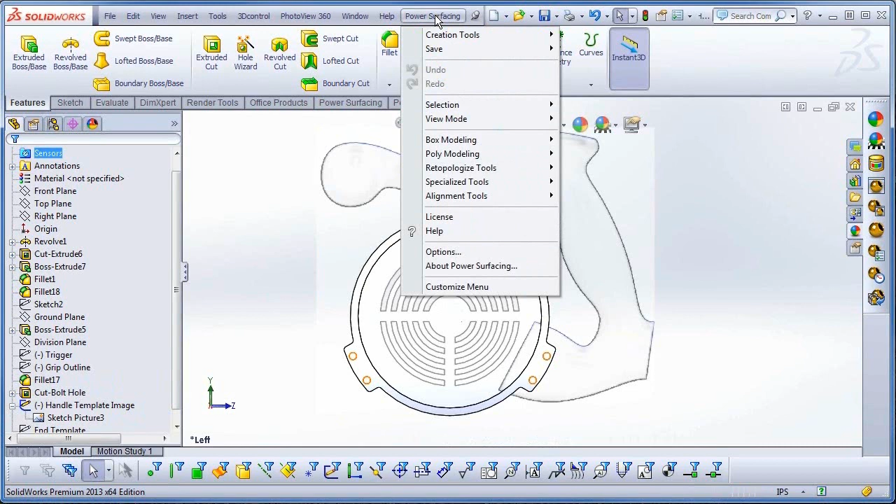In this video, I'm going to create an organic handle for a circular saw housing. I'm using a drawing I've added to a sketch from Tools, Sketch Tools, Sketch Picture. Before I start modeling the handle, I need to do one thing. From the Power Surfacing menu, Options, I need to turn on Show SolidWorks Bodies while editing a Sub-D. This will allow me to use the picture as a template while modeling.

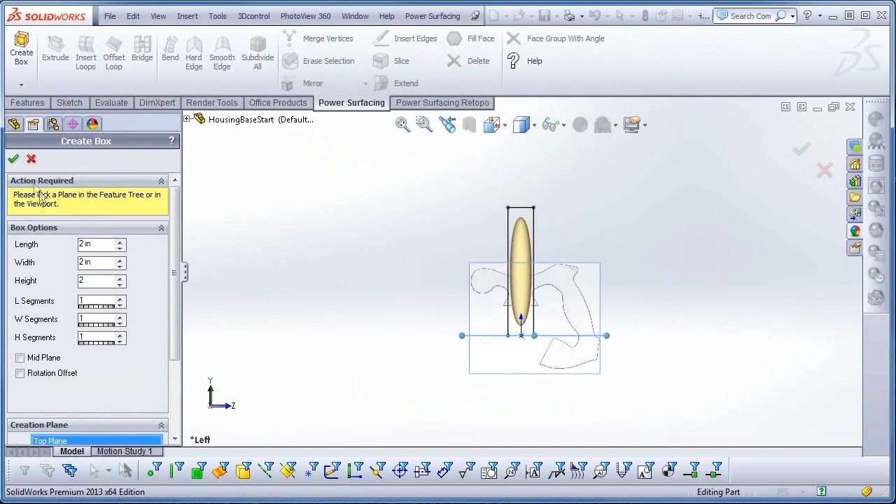Now I can hide the housing and create a simple box Sub-D. I want to scale it to 2 by 2 by 2 and go into edit mode. First it needs to be moved up, then it needs a couple of loops added. And I'll establish the top connection to the housing by adding another loop.

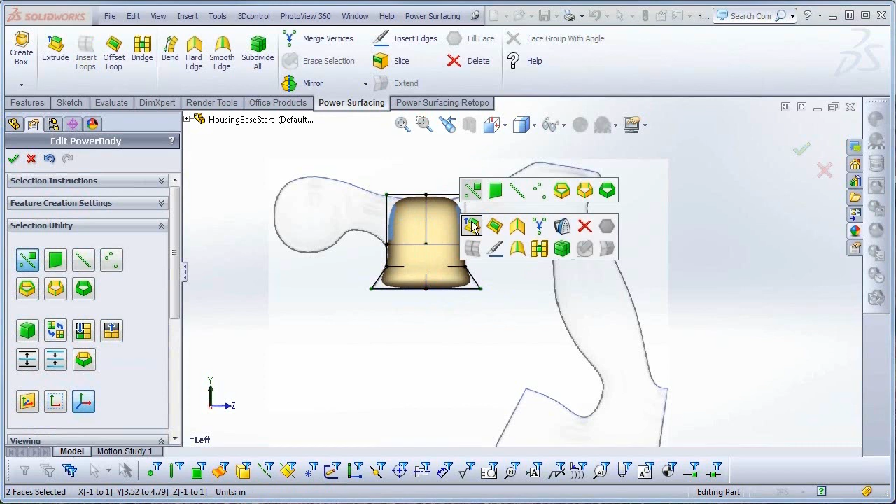Using the Extrude tool, I can get both directions started. I'm using right-click to complete the command. Now is also a good time to switch from the default Sub-D plus Cage display mode to just Sub-D.

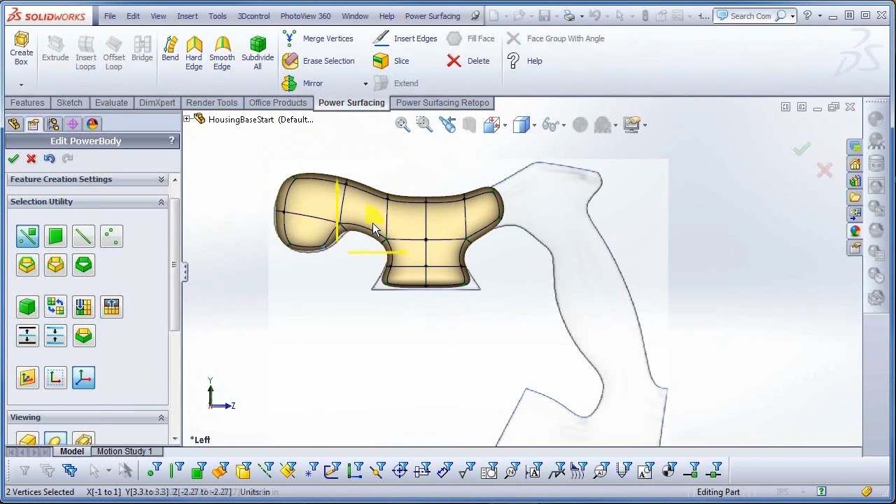Now I can extrude the front by using Quick Extrude, holding the A key while pulling the triad. This lets me quickly rough in the shape. And I can switch to any selection to tidy it up a bit more via the vertices. Moving to the other side, I'll use the A key plus the triad to block in the rest of the handle, rotating the new faces when necessary.

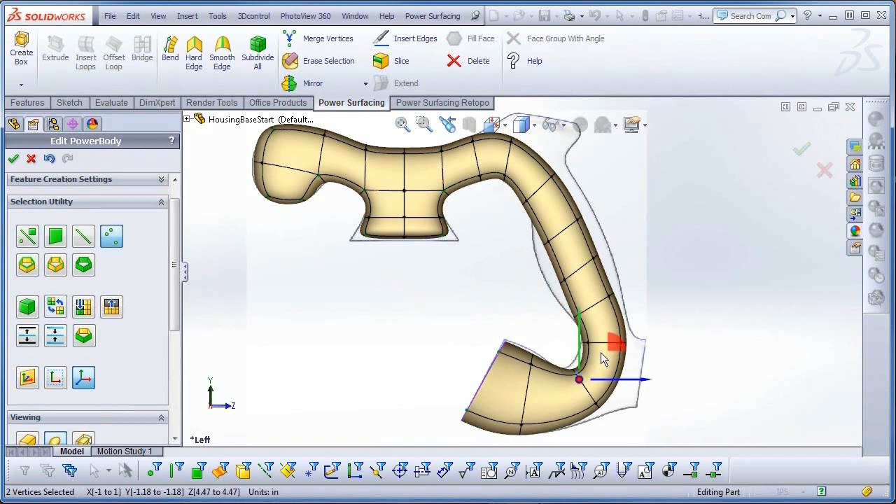At the bottom connection area, I'm setting the edges to 100% weighting for a hard edge. I'll do the same to the extruded face that will hold the power cord. The flat face will allow me to create a sketch off of its surface for the other features.

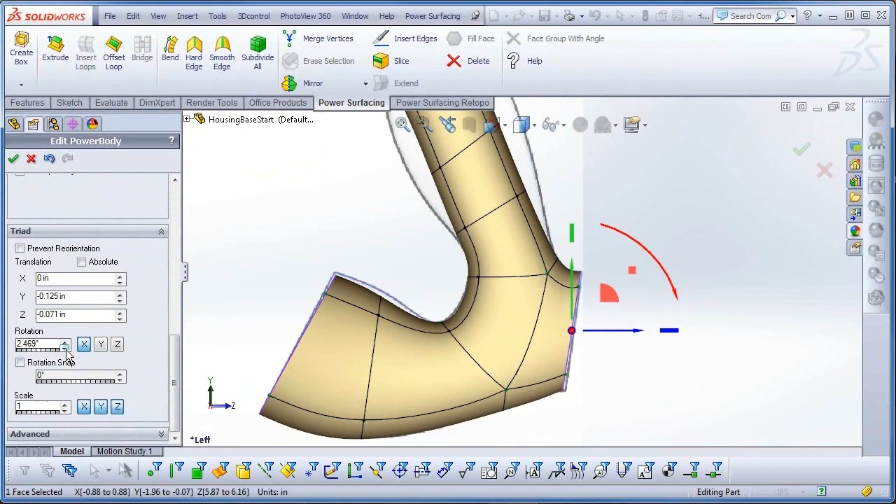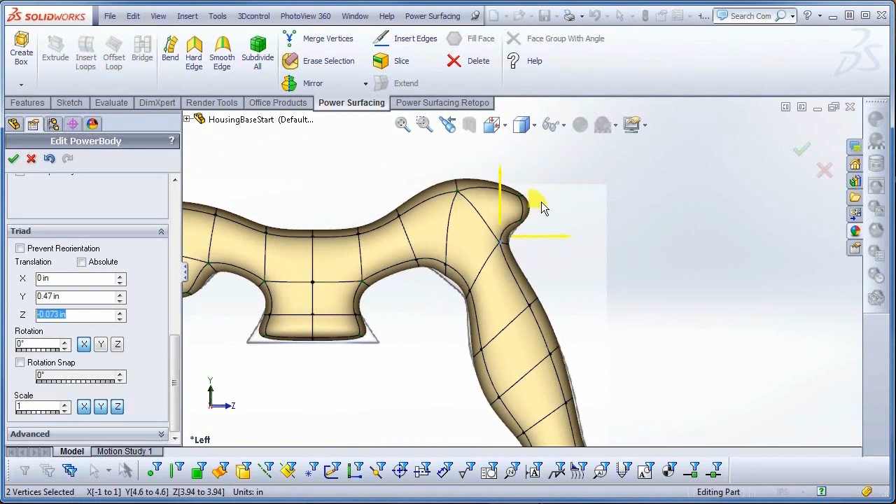To get the angle matching the drawing, I can rotate the triad from the triad section for more precise control. And then start blocking in the grip part of the handle. I'll flatten the top connection with 100% weight for a hard edge while I'm in the area.

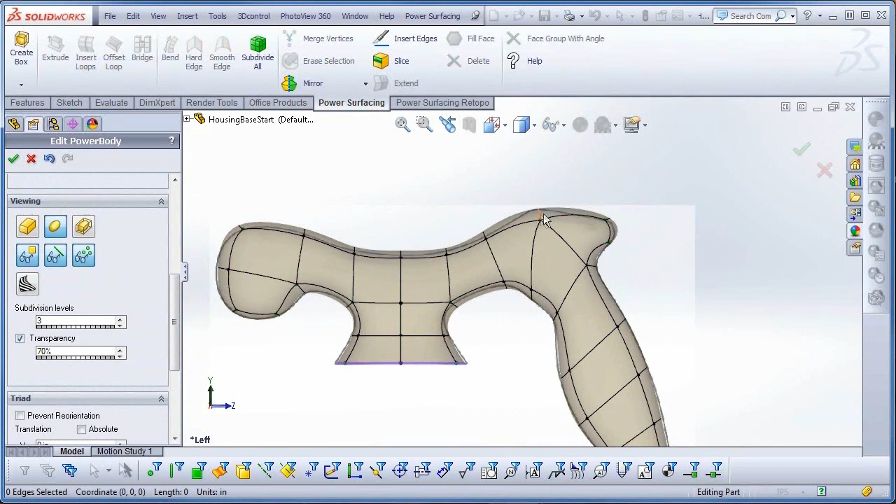When I'm ready for some serious positioning, I can turn on transparency. I'm setting it to 70%. At the knob above the hand grip, I'm going to use some partial weighting on the edges to get the shape I want. 50 degrees for the 2 top edges and 30 degrees for the 4 side edges. And I'll do some final tweaking.

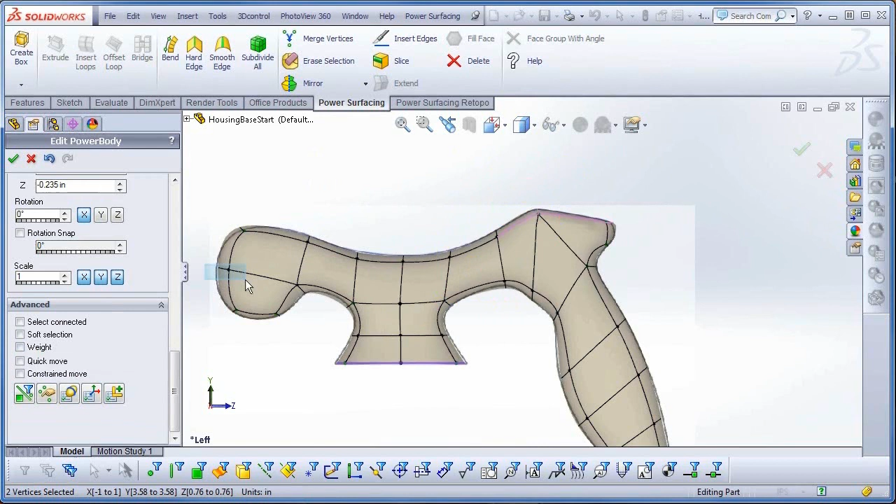Notice that instead of pulling the Sub-D vertices the way they look like they ought to go, often you need to pull at a 90-degree angle to get the change you want. Now I don't have a top image template to work from, but I'm going to select a couple of the face loops and scale them in from the top.

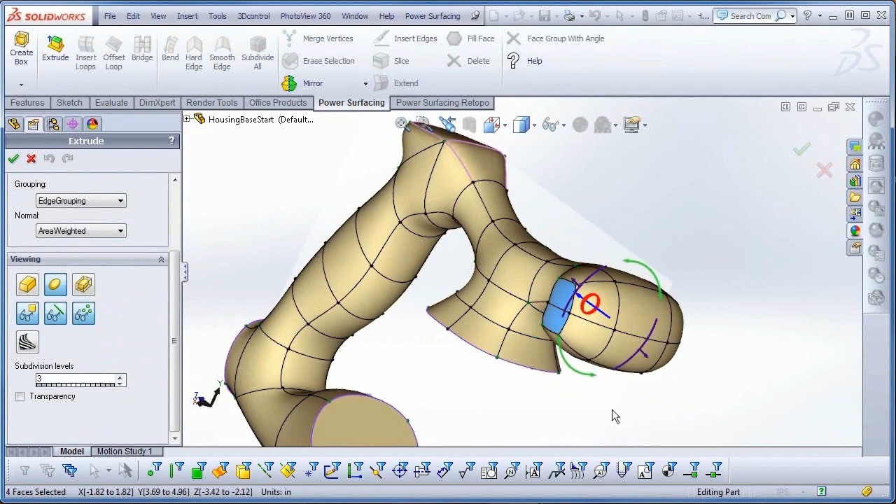And then go ahead and extrude the sides of the front grip. I'm using the Extrude tool this time so I can scale them at the same time. And I'll do some final tweaking. And I'll convert just to see how it's looking.

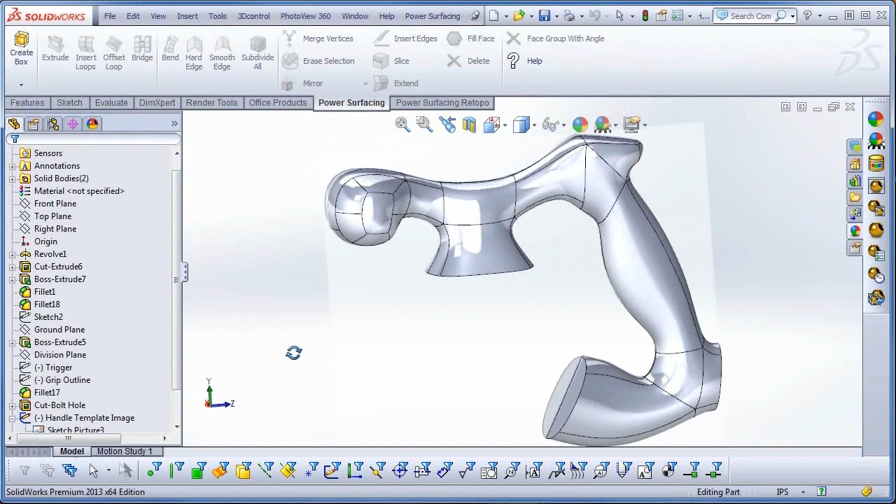I'm going to head back into edit mode next and define some of the boundaries. These will dictate where the surface edges will be created on conversion. So if I need to go back in and edit, the original edges will be retained even if the curvature changes significantly.

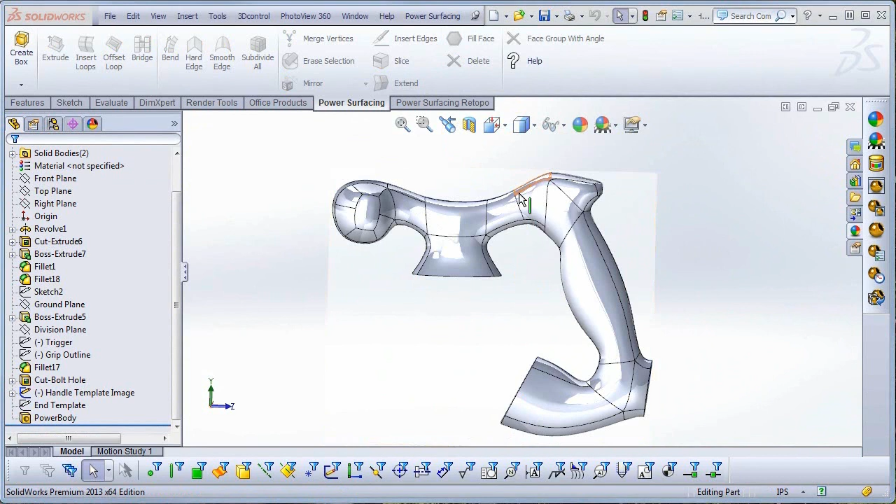After a convert, I see that I forgot to add a few more faces to my top boundary. I plan on adding some offsets and trims for more detail, so I need to redefine the top boundary. I'll convert once more and hide the template image and unhide the housing. At this point, I can start adding my regular SolidWorks features to the handle.